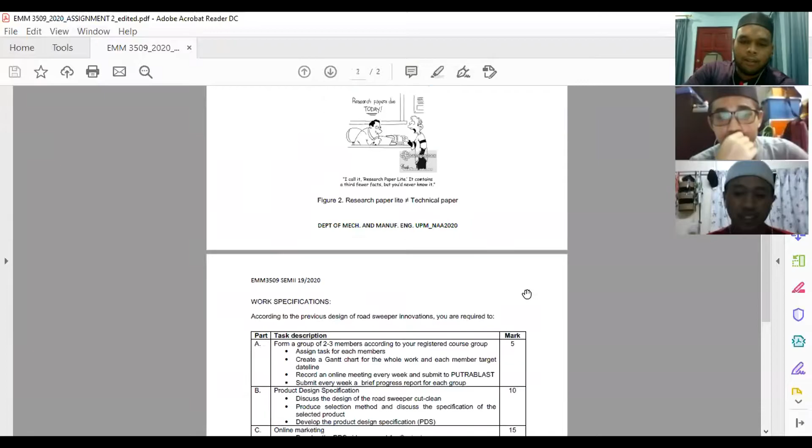The design - okay, proceed Safwan for the next. I agree. So before I miss, from this instruction you can see at the first paragraph, the first to fourth sentences, we are required to develop an innovative product to increase the productivity of cutting grass and road sweep works by introducing mechanization equipment that is low cost, can reduce the operational cost of the company, reduce road user complaints, and is user-friendly economics.

So anyone have read this? Yeah, I already read this. Me too. Okay, so now there are four parts that we have to accomplish. From part A, form a group of 2-3 members according to your registered course group. So we are already registered, so this is our group.

And then assign tasks for each member, create a Gantt chart for the whole work with each member's target deadline, record an online meeting every week and submit to PUTRABLAST, and submit every week a brief progress report for each group. So this is part A.

So part B, product design specification. Discuss design of the road sweeper cut clean, produce selection method, discuss the specification of the selected product, and develop the product design specification.

I want to ask something - do you guys understand what is the product design specification? I think Aiman can explain it. In my opinion, to develop the product design specification, maybe we can go further with our own design in many parts such as the blade, the engine system, the mechanism of the blade, and the body, and so on. That's all for my opinion about the product design specification.

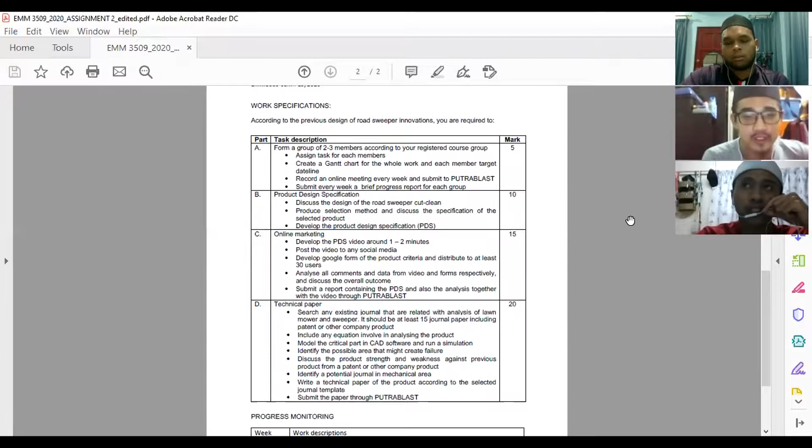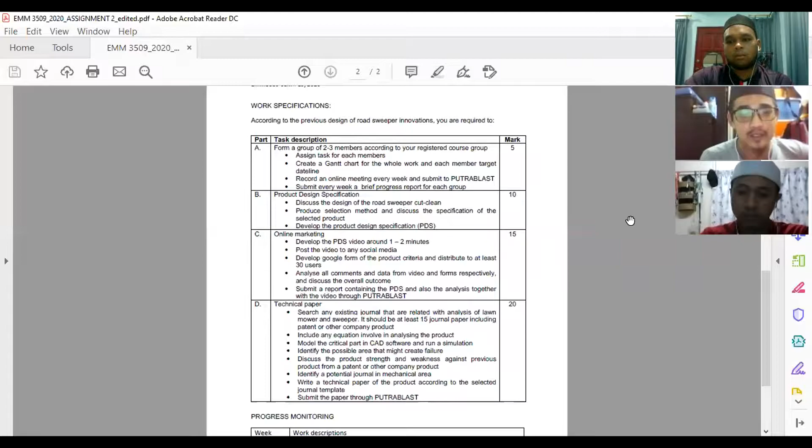Yeah, I agree with Aiman Jumani about his opinion. How about Aiman Hakimi? Yeah, basically it's the specification for the design that we choose for this task. Basically it involves everything that needs to be displayed, conveyed to the customer or to our company - basically we have designed the product, so we specify the detail for the product. That's all. Okay Aiman, thank you for your opinion.

Okay, we proceed to part C. Part C, we have to do the online marketing. So first, develop the PDS video around 1 to 2 minutes, then post the video to any social media, and then develop a Google form of the product criteria and distribute it to at least 30 users.

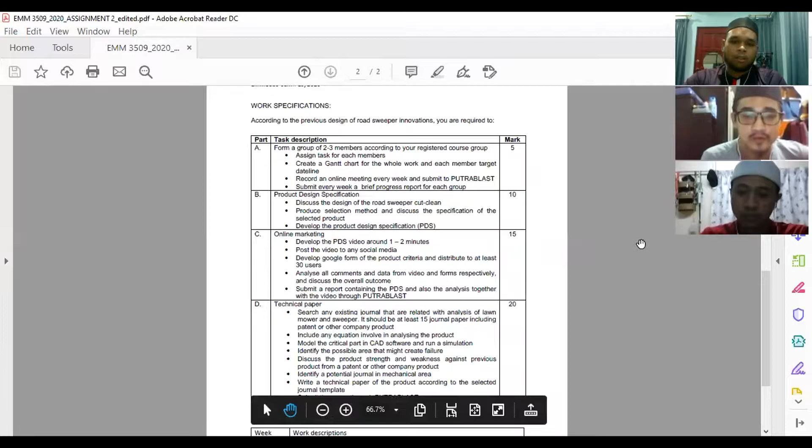And then analyze all comments and data from the video and form respectively and discuss the overall outcome. Then lastly, submit a report containing the PDS and also the analysis together with the video to PUTRABLAST.

And then for part D, we have to do the technical paper that we have learned during our production and automation course. So everyone has their experience to do the technical paper.

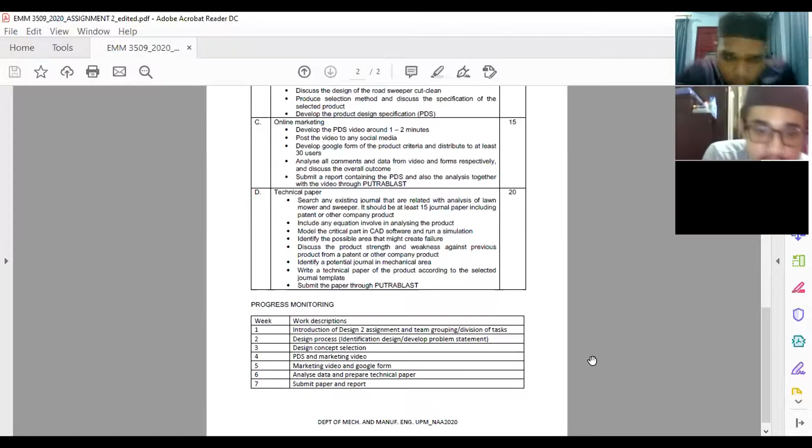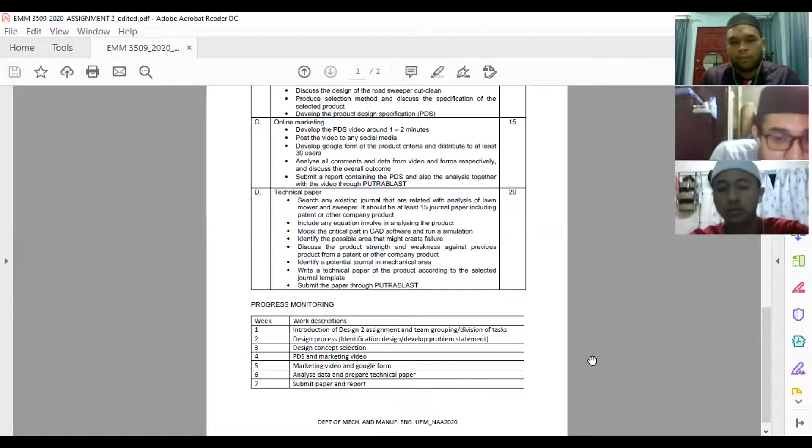So in the technical paper, basically we have to search for any existing journal that is related with analysis of lawnmower and sweeper. It should be at least 15 journal papers, including patents or other company products.

And then we include any equation involved in analyzing the product and then model the critical part in CAD software and run a simulation. Then identify the possible area that might create failure and then discuss the product's strength and

weakness against previous products from a patent or other company product, and then identify a potential journal in the mechanical area, and then write a technical paper of the product according to the selected journal template. Then lastly, submit the paper to PUTRABLAST.

Okay, so the doctor has given us the progress monitoring, starting from week 1 until week 7. But unfortunately, we got this assignment on week...

I think in week 3. So same as week 10 now. So week 10. So I think for the division of tasks, I will give to you guys starting from week 10. Is it okay? Alright, I'm okay with that.

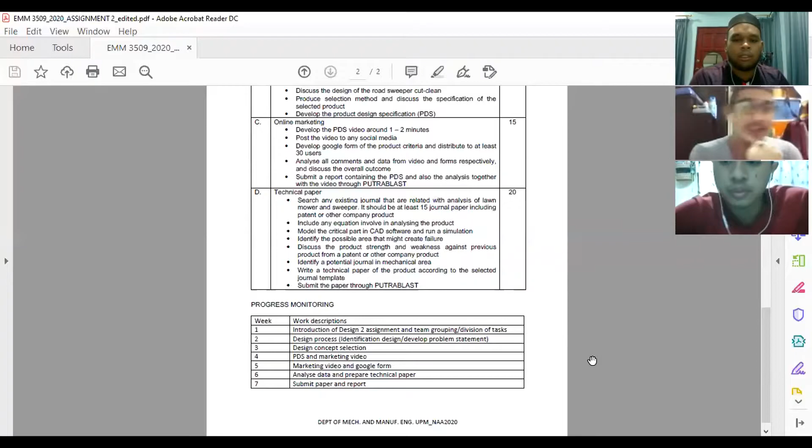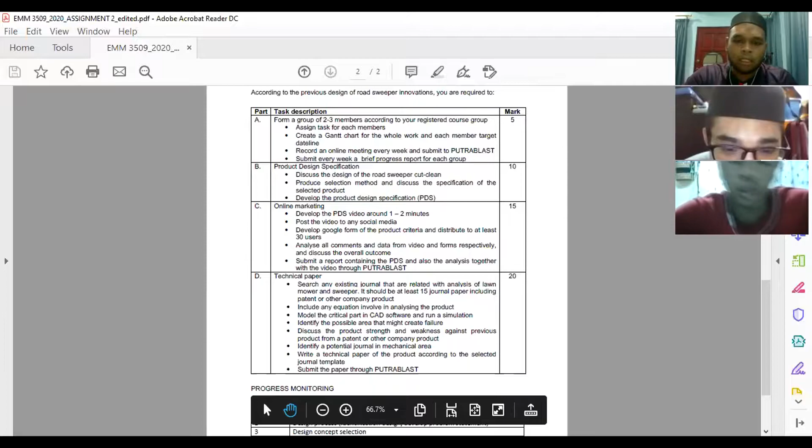Okay, so I will give the part that you guys want, or do you guys volunteer to do it. So wait, I will try to separate it. I think I will separate by part A, part B, part C, and part D. Are you guys okay?

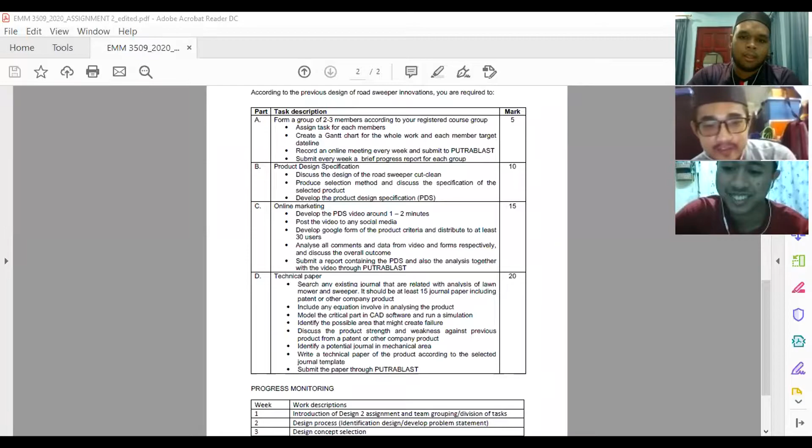Yeah, okay. So from part A, firstly you have to produce a Gantt chart. So I think the Gantt chart I can do.

Okay, so for the division of task, I will distribute from part A, part B, C, and D. Are you guys okay? Yeah, I think I'm okay with that. I think I follow you.

Okay, so from part A, I will produce the Gantt chart. So I think the target deadline is 20 June 2020.

And then design process, identification design, and develop problem statement, so everyone is taking part in this. So the target deadline is on 21 June 2020. You guys okay?

Yeah. Okay, then the submission of the recording video meeting and progress report for week 10, we submit on 22nd June 2020. Alright?

Alright. Okay, and then for part B, we started on week 11. So for part B, we started for the design, concept selection,

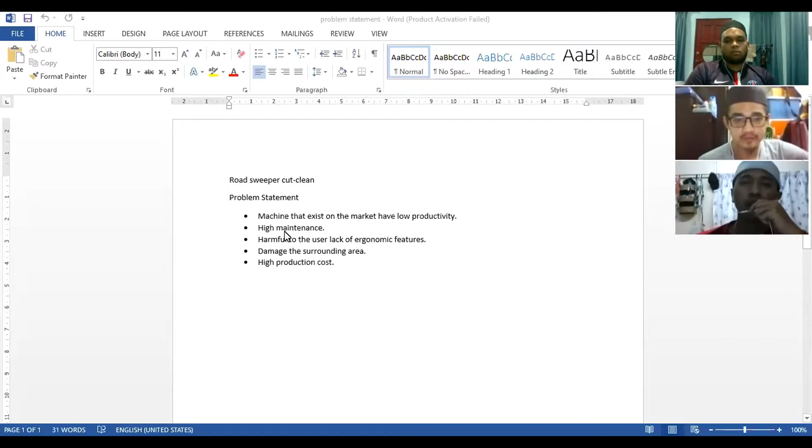The first problem statement we have is the machine that exists on the market has low productivity, which means the machine is not efficient to cut or sweep the rubbish. The next is the second problem statement, high maintenance - sometimes the machine that exists on the market has high maintenance, where the spare parts are pricey.

Next, the problem statement is harmful to the user, which is lack of ergonomic features. This is one of the most important parts because we as humans have limitations.

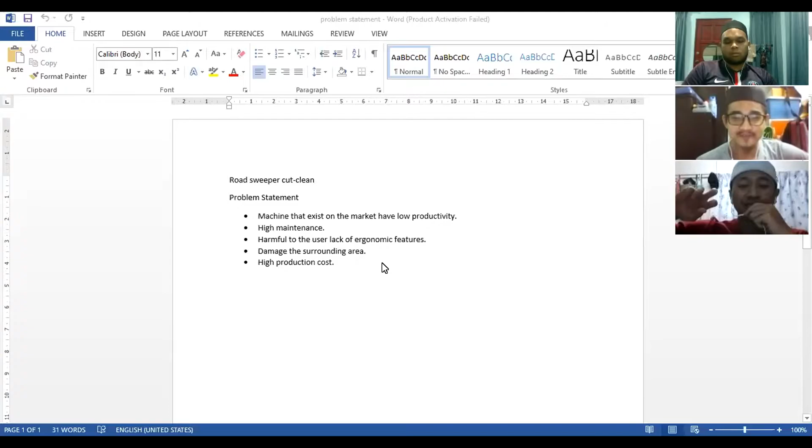Next, damage to the surrounding. Basically, the machines that exist in the market cause damage to the surrounding. For example, when we cut the grass, the blade sometimes makes debris or other substances fly, and this can harm cars or people around the area.

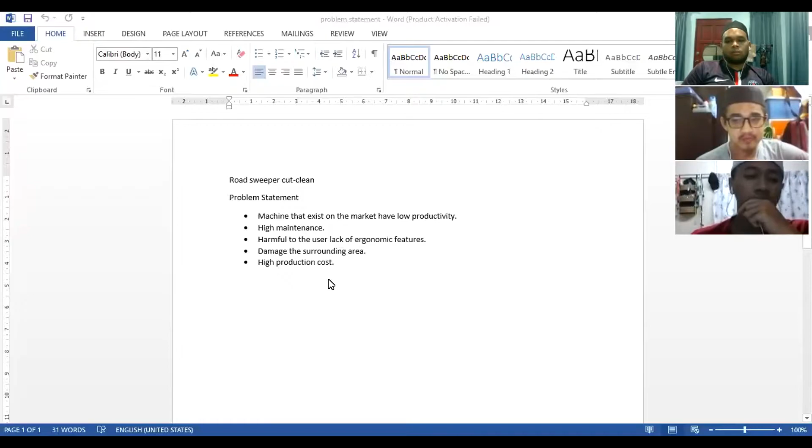So the last one is the high production cost. Sometimes the production cost will be high because the body or the engine has a high specification.

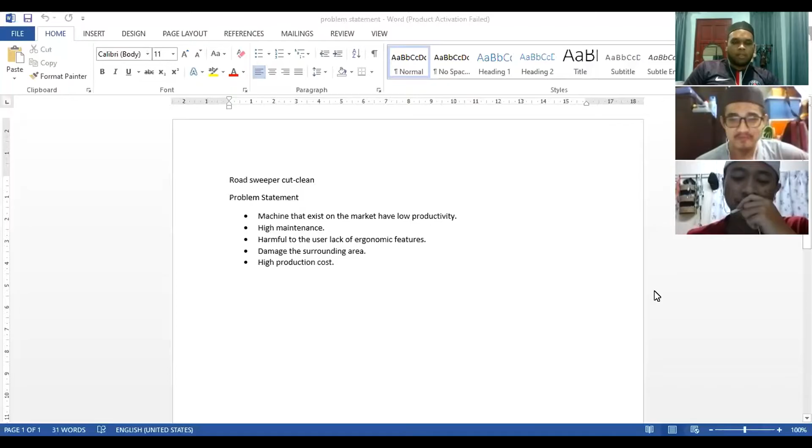So guys, can you add something? I think this problem statement is okay, but maybe I will correct some grammatical errors. Yeah, because all the problem statements that I used are just roughly drafted. Later I will edit it. Thank you, Safwan.

So Aiman Hakimi, want to add something? No, I think these five problem statements that we have - for me it is quite hard to ensure that all the problems are settled the same in just one machine. So I think we really need to think hard to design our machine properly. Okay, we will try our best to design the machine that can solve the problems that have been stated.

Okay, alright. Okay Jumani, you can proceed. So we already saw the problem statement, so now we're going to do the identification design. So who's going to start with your design choices?

So if you guys see, this is my design. This is the previous design. As you can see, I can zoom. So this is the overall of my design, and the specification.

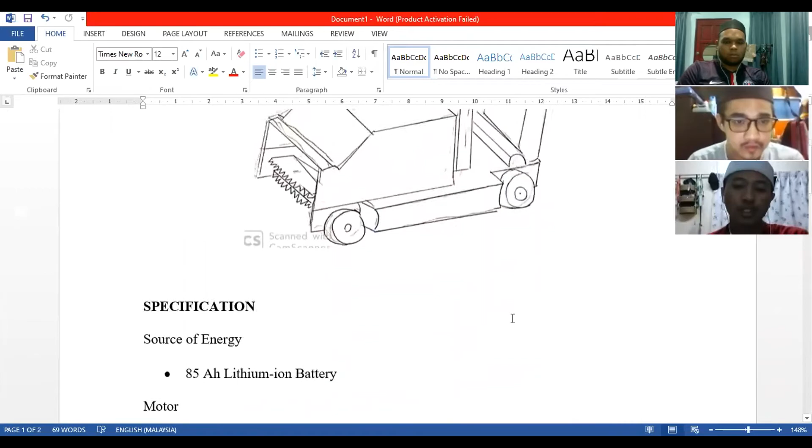The source of energy for my lawnmower grass cutter is an 85 ampere hour lithium ion battery. I chose 85 ampere hour because I already calculated so it's suitable for this machine. Lithium ion is one of the types of battery that exists in the market nowadays, and it's familiar.

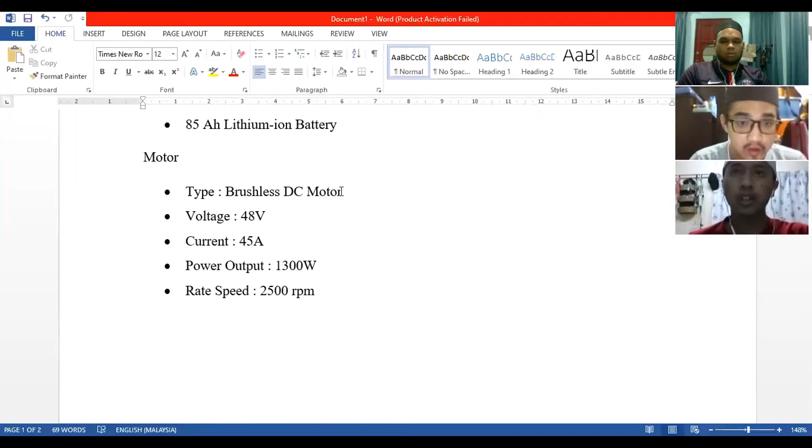Next is the motor. The motor I use is the brushless DC motor. Basically the brushless DC motor is quite good because it has less friction and it will increase the speed of the motor. The voltage I use is 48 volt, current 45 ampere.

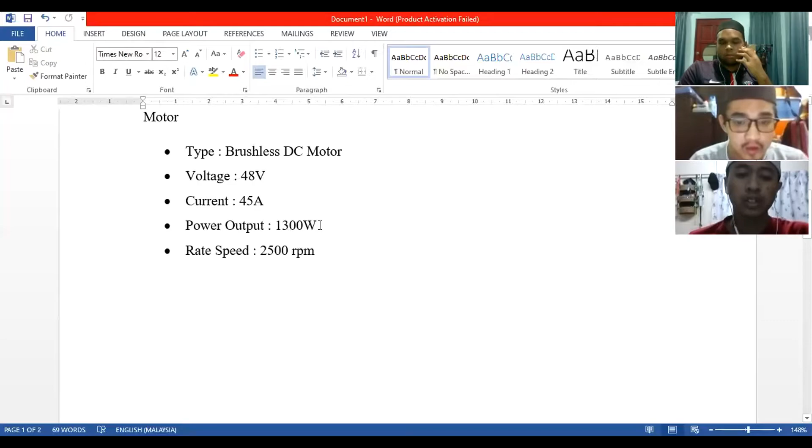The power output is 1300 watt because it can produce more power, so it's easy to cut the grass. The rate of speed is 2500 RPM.

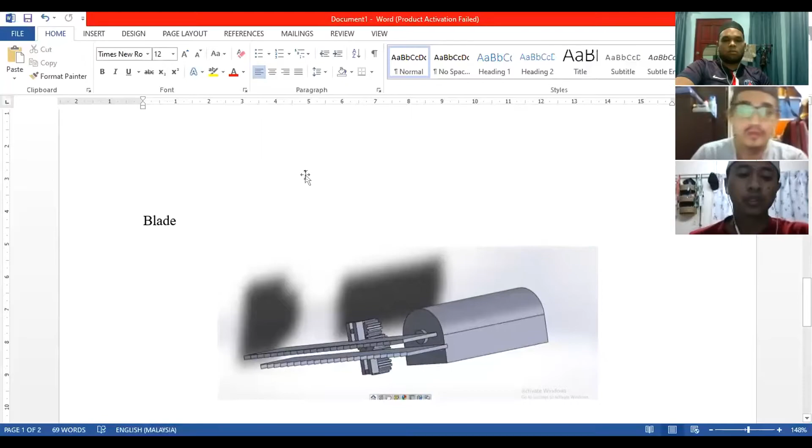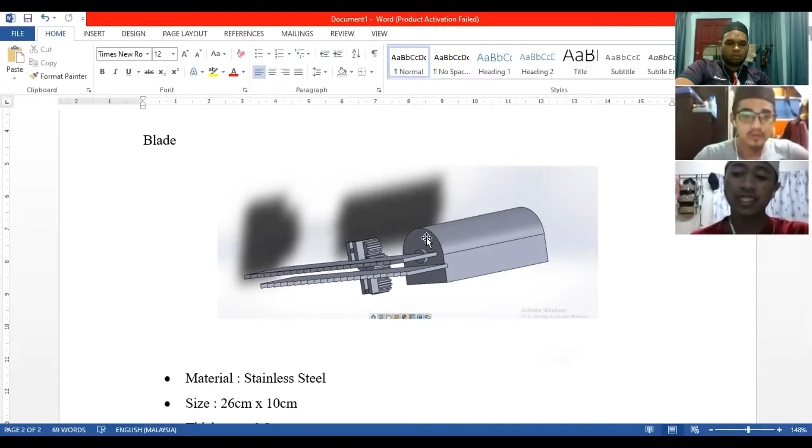Next is the blades. The idea for the blades comes from a hair cutter. The material is stainless steel, the thickness is 0.2 cm, and the number of blades I use is 3 blades.

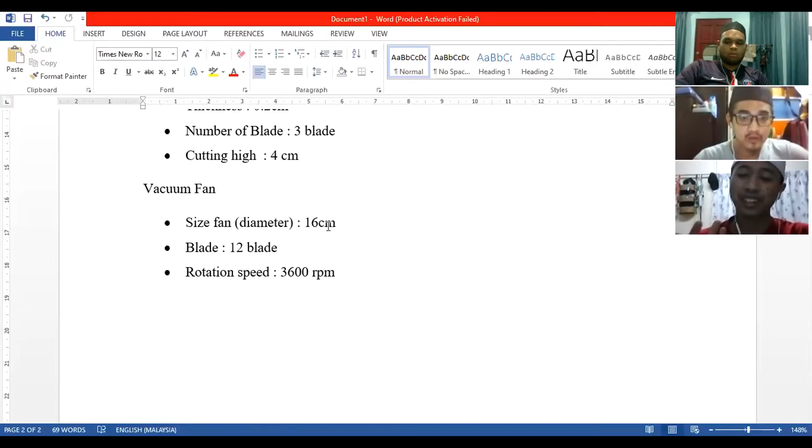The vacuum fan I use is size 16 cm. It can vacuum, it can suck the grass and the leaves. The rotation speed is 3600 RPM.

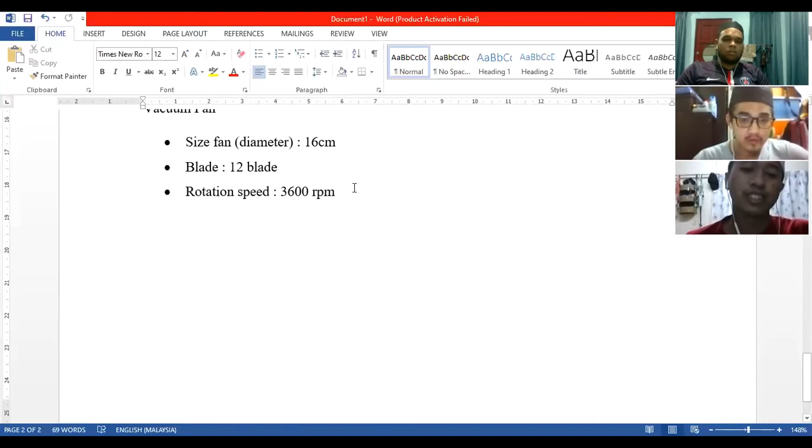That's all for my design and specification.

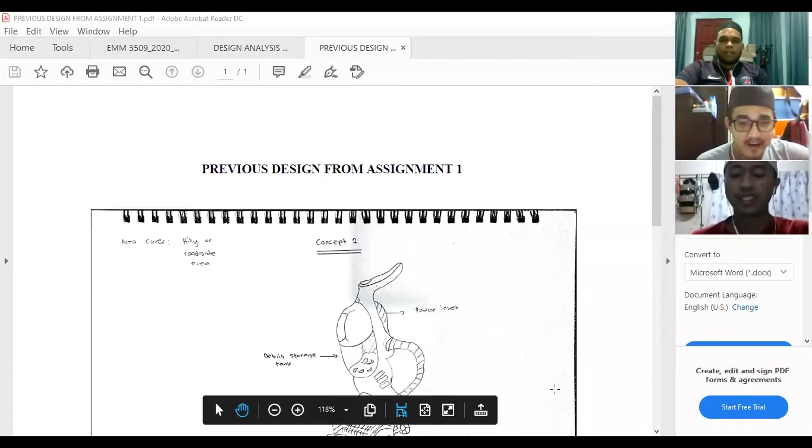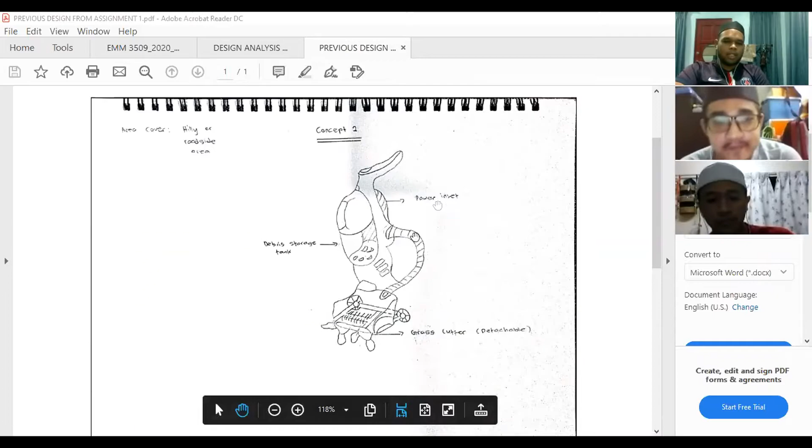So this is the previous design I used for assignment 1. This is the overall design of my innovation of road sweeper, and this design is inspired from a vacuum cleaner.

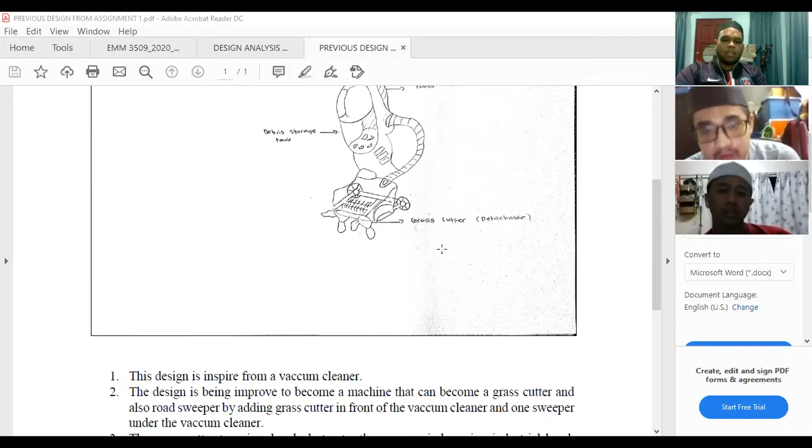From the existing vacuum cleaner in the market, I added some blades, 2 blades here, one brush here, and also 2 tires, so it's easy to push or pull the machine. This design is improved to become a machine that can be a grass cutter and road sweeper.

I added a grass cutter in front of the vacuum cleaner and one sweeper under the vacuum cleaner. The grass cutter type is brush destructor, because this brush destructor has high efficiency of cutting the grass compared to other types of destructors.

The sweeper I use is the industrial brush sweeper sold in the market, and the price is not high, quite cheap. The sweeper is a recycled one, made from a recycled sweeper that has been used before.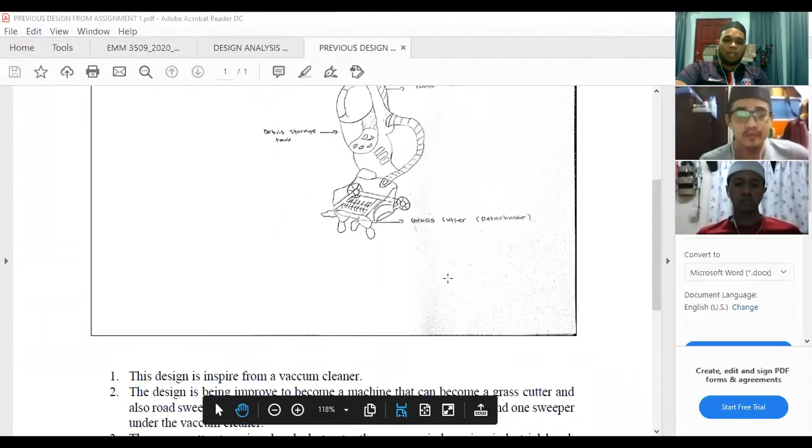And the debris storage tank, this one is the debris storage tank, material is recycled plastic. So mostly here we use recycled items.

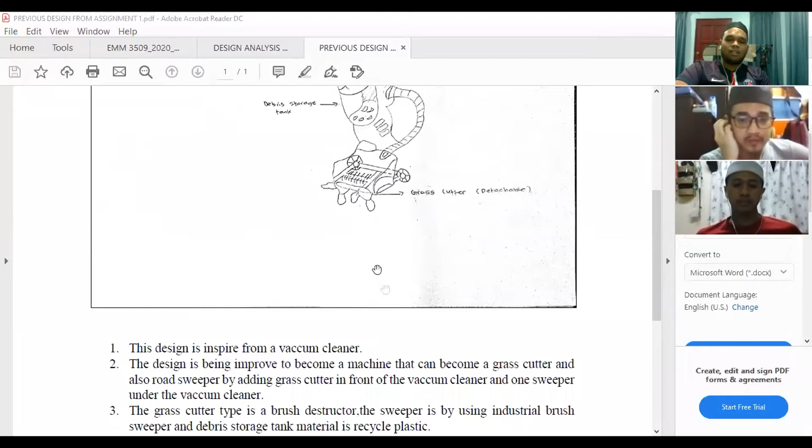The machine is user friendly. It's not using a power inlet because it has a tire here, so we can pull or push it. The machine is not too heavy or too light, and it's also cordless and portable to use anywhere. Why is it cordless?

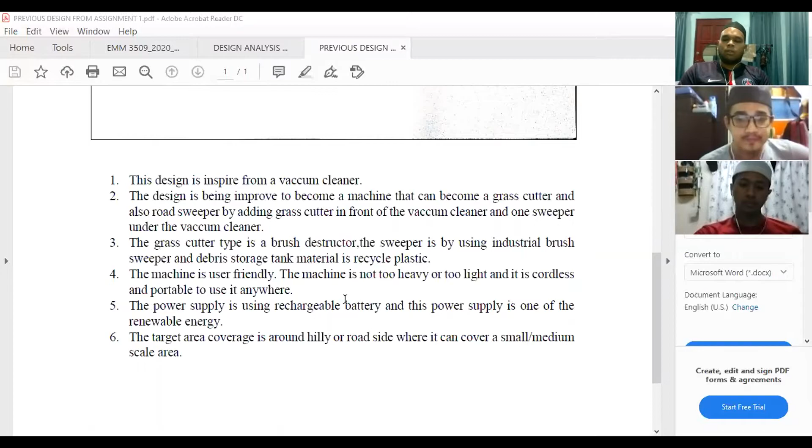Because the power supply used is a rechargeable battery, and this power supply is one of the renewable energy sources. We want to save our environment, so we have to use a power source that is not harmful to the people or the environment.

The target area to use this machine is around hilly or roadside areas, where it can cover a small or medium scale area. So that's the overall design.

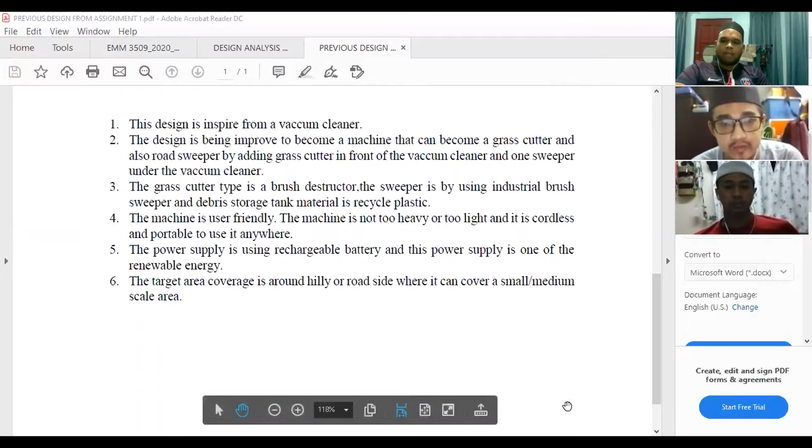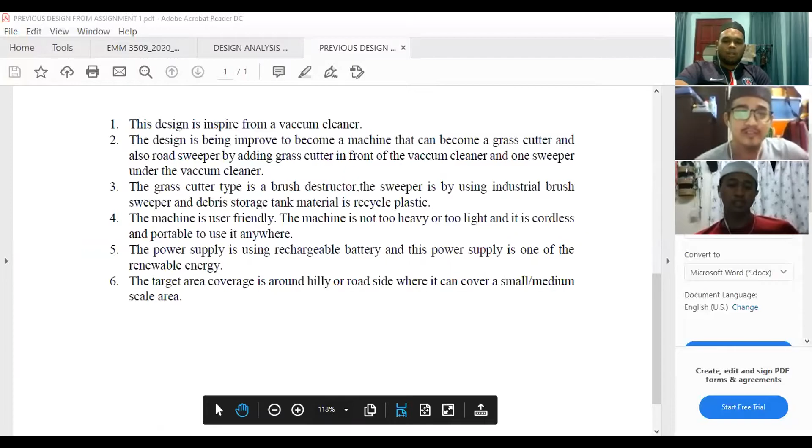Should I touch on the design specification or not, like Aiman just showed us? If you can proceed, just proceed. But it's quite long, I will try to make it simple.

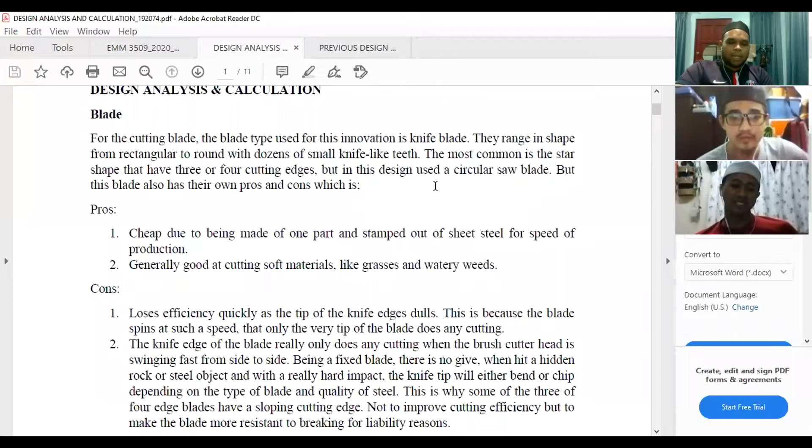So, the blade. The blade uses a circular saw blade like this one. Even though it's not the same in the picture, but this one.

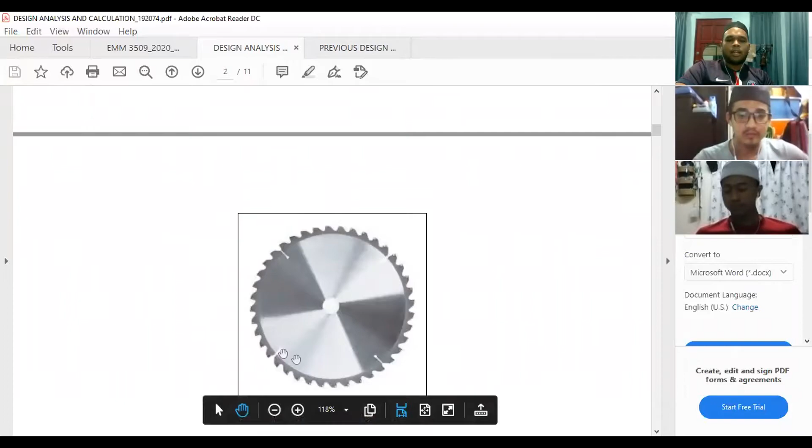The cutting ability: the knife blade relies on the sharp leading edge of the blade to cut, but since the blade is spinning at around 100 to 120 revolutions per second, only the very outer edge generally does any cutting. So the blade will cut the grass using the outer blade.

For the blade design, circle diameter is 300 millimeters, and the large radius is 150 millimeters.

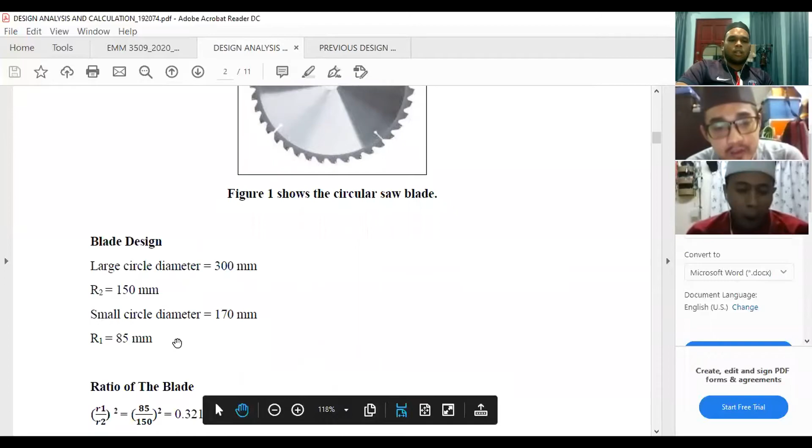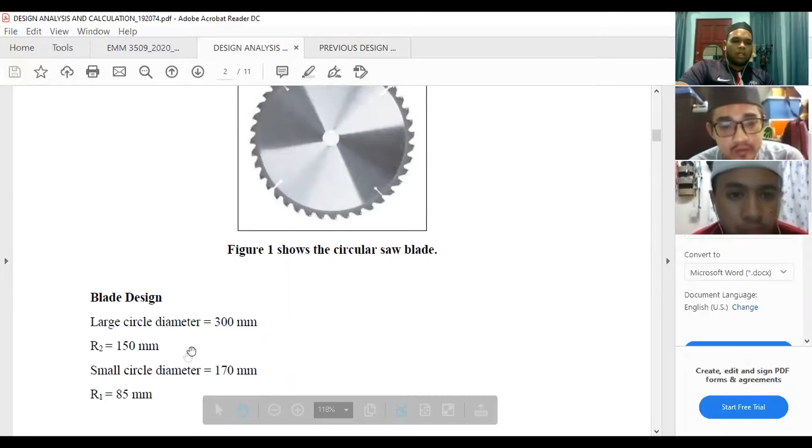The radius, the small radius is R2. The small circle diameter is 170 millimeter. Then R1 is the large radius, 85 millimeter. Sorry, R2 is the large one, R1 is the small one.

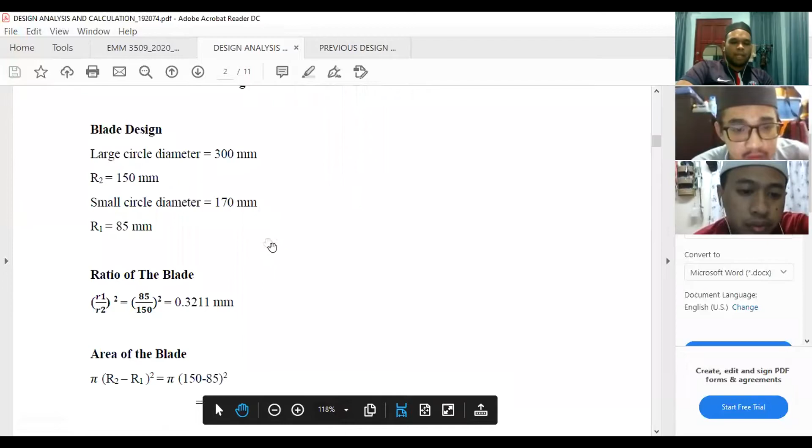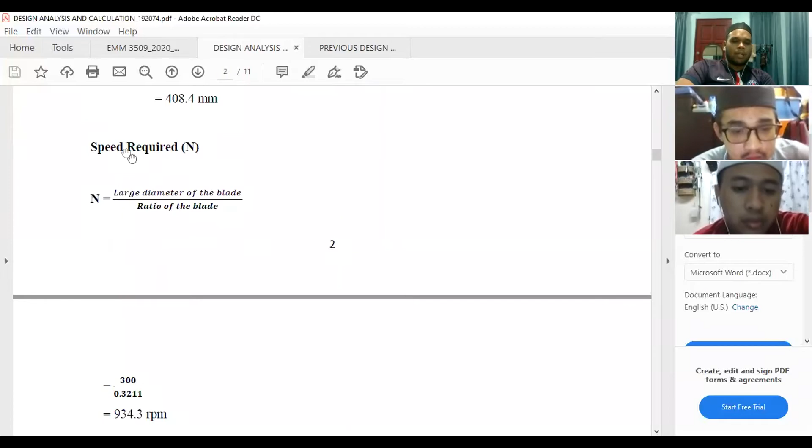So the ratio of the blade, this one is because of calculation, so I think it's not necessary. So the RPM, the speed required for this blade is 934.3 RPM.

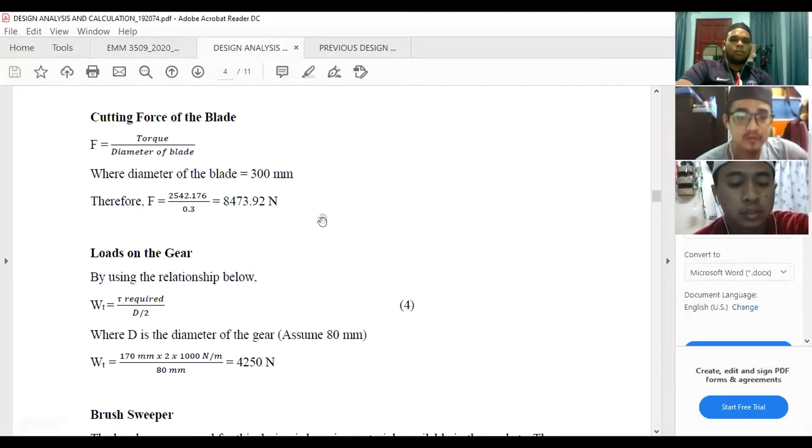And then the torque is 2,542.176 Newton meter. And then the power is 16.17 kilowatt. And then the cutting force is 8,473.92. It's quite high, loads on the gear as I mentioned.

And then I use the brush sweeper like this one, but the picture is not the same as this one. I know I'm bad at drawing, so sorry. So the brush, use material polypropylene bristle, length of brush base 300 mm. Diameter of the thread is 2 mm and length of the thread is 120 mm.

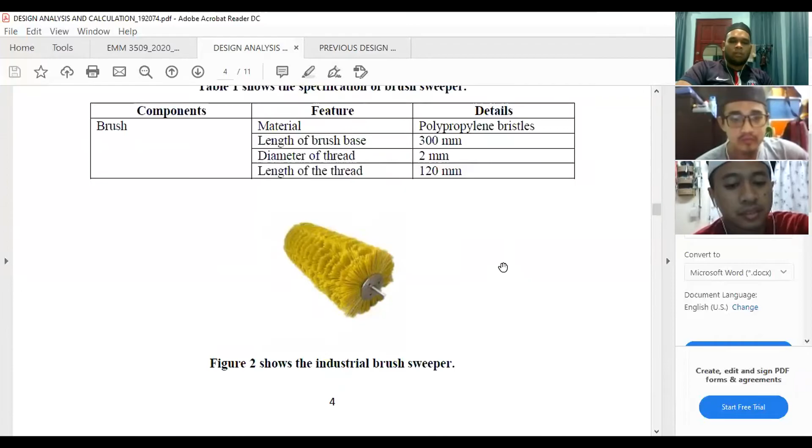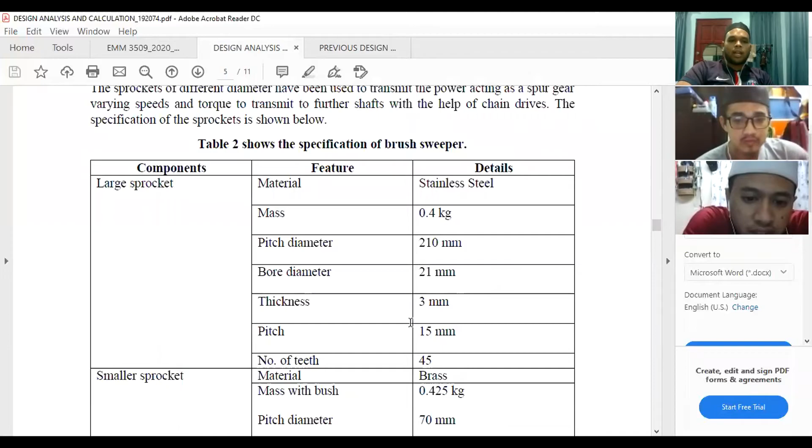So basically, because the cutter and the tire use the sprocket and also the chain, but I didn't draw it on the sketch, so I will skip this one.

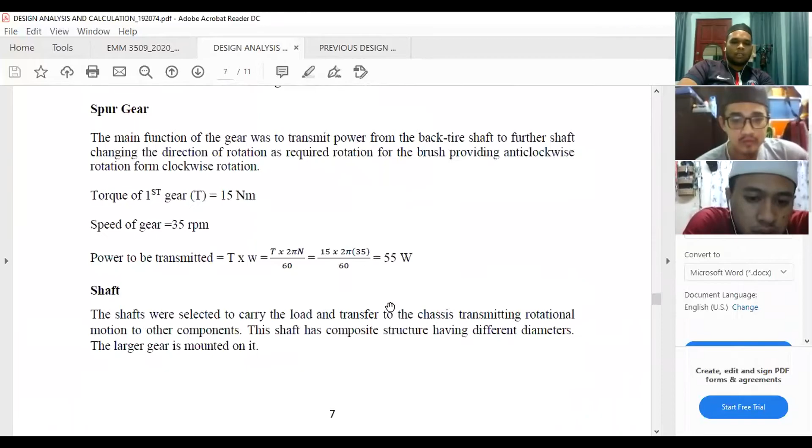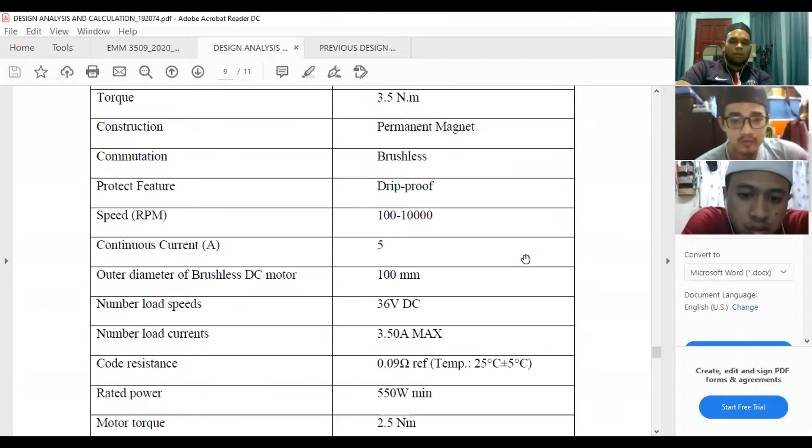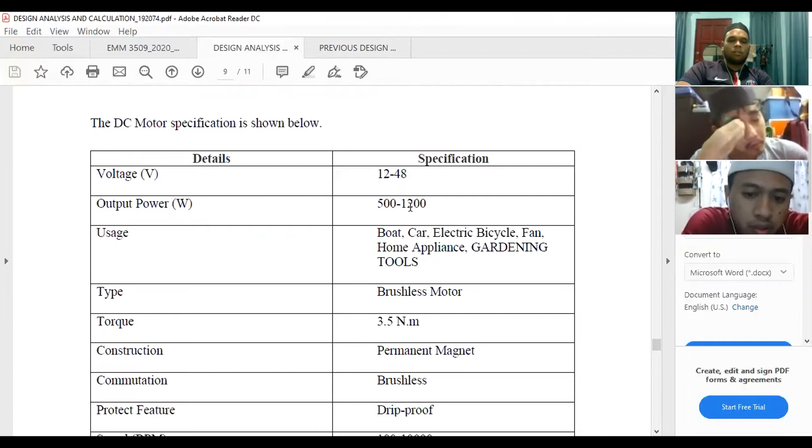Shaft. So I use the electric DC motor, same as Aiman Jumani. The specification is quite long, but I'll touch the important ones. Voltage is 12 to 48 voltage. Output power is 500 to 1,200. Type is brushless motor, torque 3.5 Newton meter. Continuous current is 5 ampere. That's all.

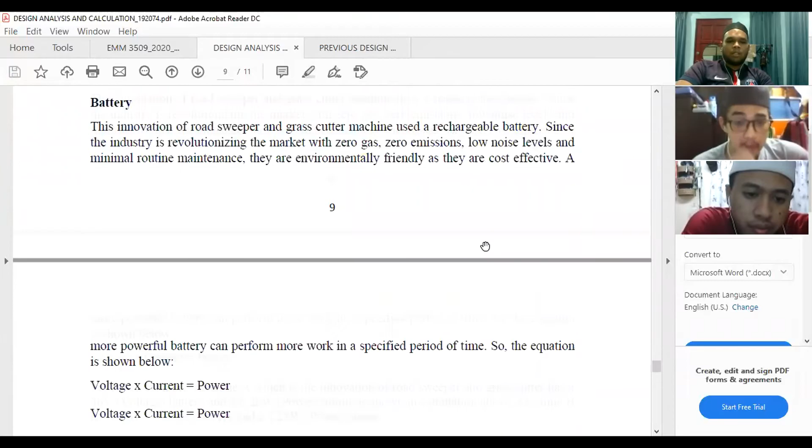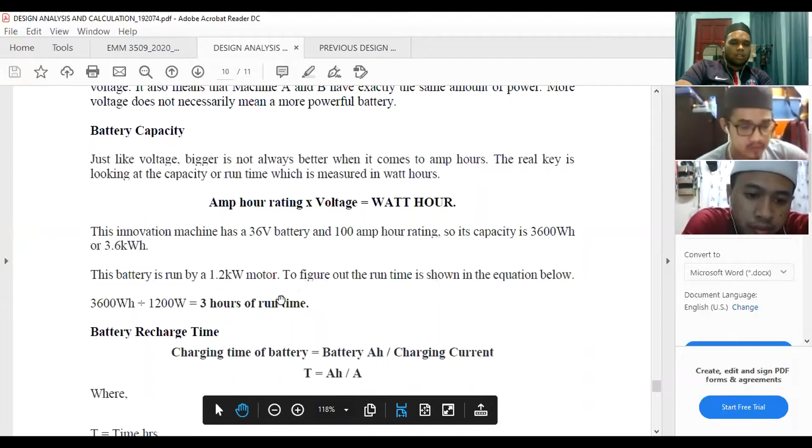Then so the machine uses the battery. So the battery lifetime, battery capacity - the battery capacity is 3,600 watt per hour divided by 1.2 kilowatt, because the motor runs by 1.2 kilowatt. So that's 3 hours of run time.

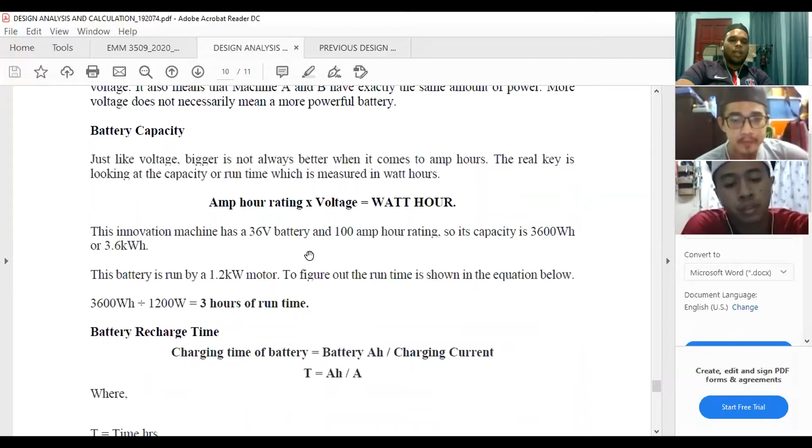And then for recharging the battery, it needs 9 hours to recharge the battery. It's quite a long time to recharge the battery.

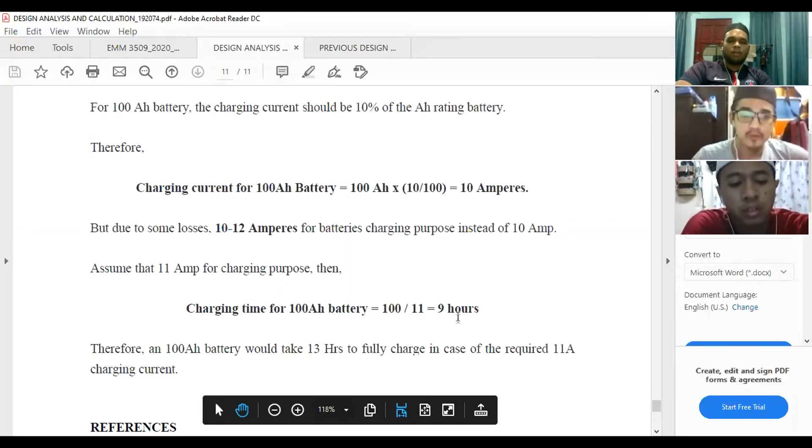Alright, okay, so that's all from my design. Sorry because it's too long, but I hope you guys understand about it. Okay, thank you.

So I will continue for my design.

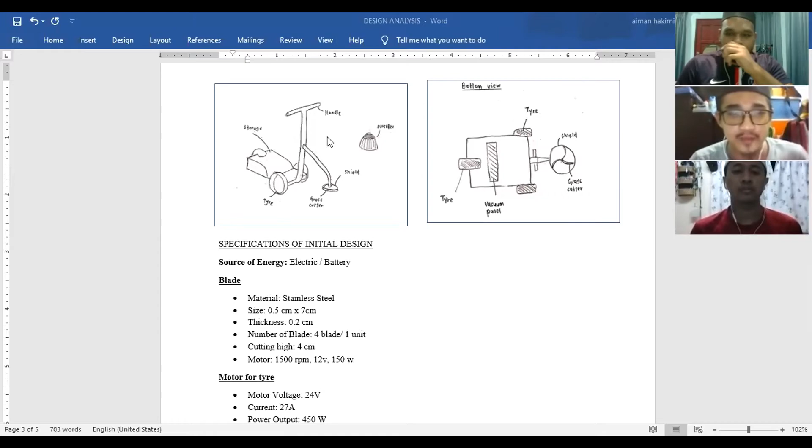So here, you all can see this is the design that I chose for the road sweeper and cutter. As you can see, this is the sketch of the machine. I got the idea from the electric scooter and hoverboard, so I just combined it and then put the cutter and sweeper in front. So that is the rough idea for the design of my machine.

So basically, I will go straight to the specification because I don't intend to explain too long. You can see here I already listed out all the specifications for the material related to the design of my sketch.

Basically, the source of energy for this machine, this tool, is fully operated by electricity, so the battery is the only thing required for it to operate. The battery is the same as Aiman Jumani's battery, which is lithium ion, as it is rechargeable and can contain a large capacity of energy. So basically, this machine, from my calculation, needs to operate with a large input of electricity. That's why I need to put the battery with high capacity, which is a 20,000 milliampere battery.

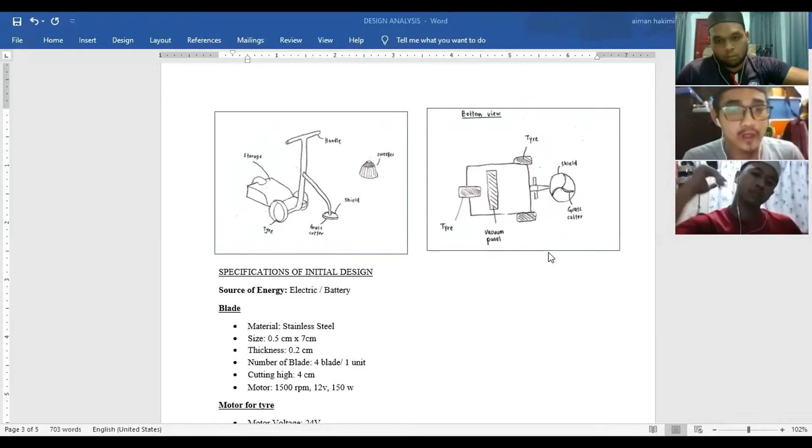And for the motor for the tire, you can see basically in my design, I separate all the power. For example, the power needed to operate the grass cutter, the power needed to move the machine, and the power for the vacuum to operate. So these three main components of my design operate with different amounts of power.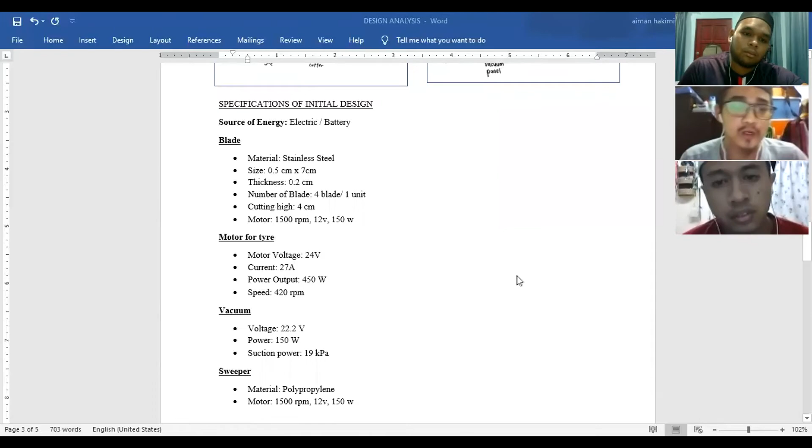So I separate all the power, but the source is still only one battery. The vacuum power is 150 watt. The motor for the tire is 450 watt, and the sweeper is the same as the blade, which is 150 watt. So these components use different amounts of power.

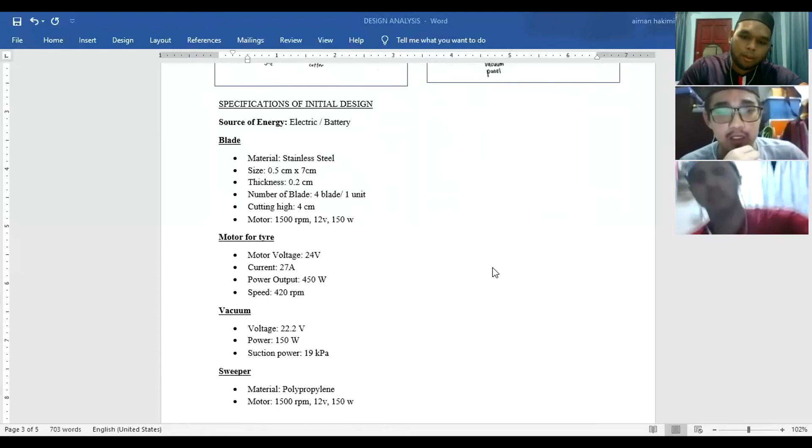And for the vacuum, from my research, a suction power of 19 kilopascal is already good enough to suck out all the debris, all the grass that has been cut, and all the rubbish that the machine sweeps.

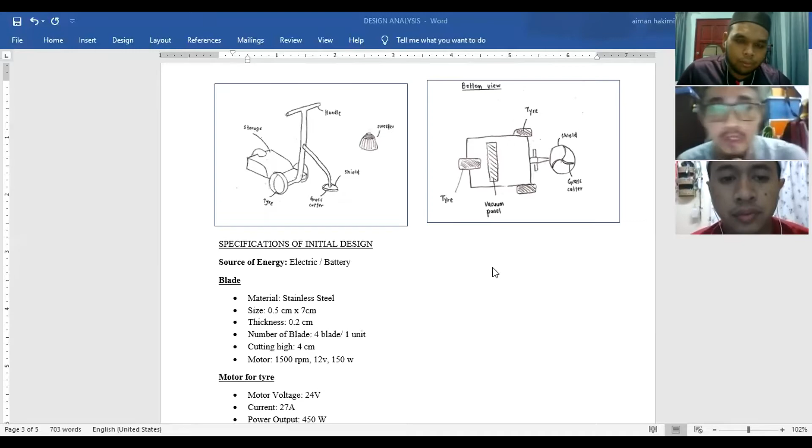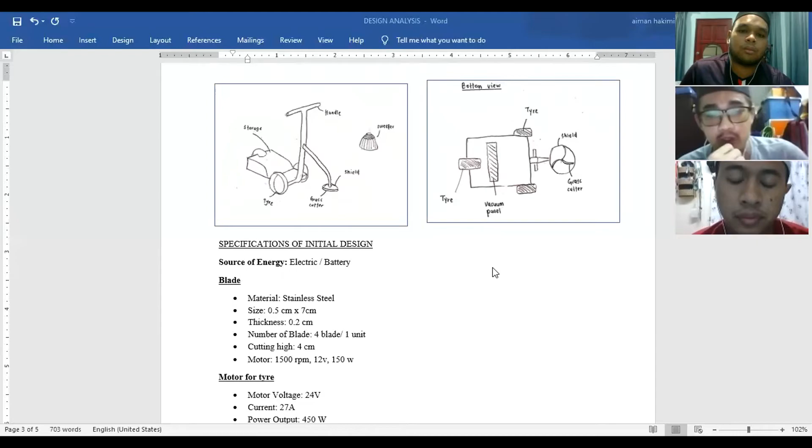This machine is basically designed for residential area use, in order to cut the grass in house areas, not for large-scale processes such as fields or areas that need the machine to operate for a long time. So this machine basically can run about 3 to 4 hours only. That's why it is suitable for residential areas which are not too large, and all the components are suitable for that kind of process and area.

So that's all that I can share about my design.